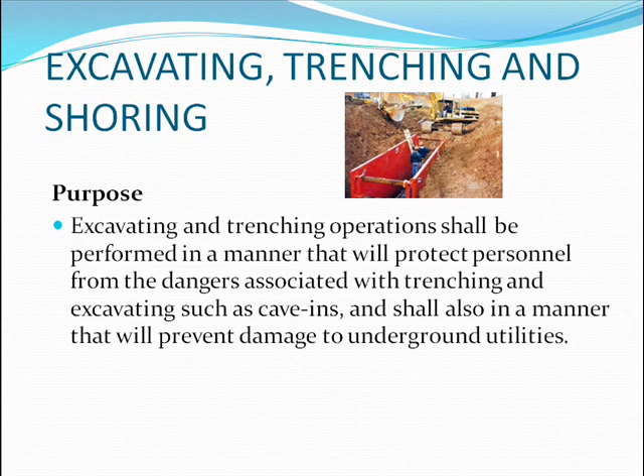Responsibilities. Health, safety, security, and environmental. HSSE has the primary responsibility for assisting departments in implementation of this policy through coordinating training and consultation.

This includes on-site evaluation to monitor use of safe work practices and procedures, assisting with atmospheric testing and equipment selection as needed, providing or identifying appropriate training for competent persons and staff, and reviewing and updating this program at least annually.

Managers and supervisors. Supervisors have the primary responsibility for the implementation of the trenching and excavation safety policy in their work area. The supervisor has ultimate responsibility for the safety of the employees and general public affected by the excavation.

This includes the evaluation of the work to be performed, determination of the means of protection that will be used, and adherence to the provisions of this policy as appropriate.

The supervisor must ensure daily, or more often as required, that site conditions are safe for employees to work in excavations. The supervisor or a member of the work group must be a competent person as defined by OSHA.

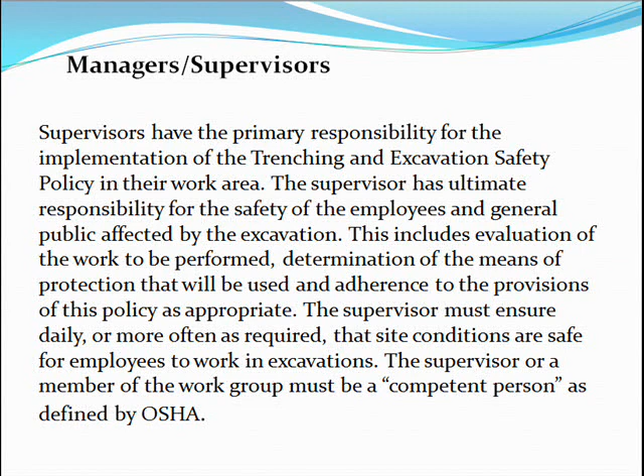Employees and partners. Employees and partners are responsible for the following: asking questions of their supervisors when concerned about an unknown or hazardous situation or substance, reporting all unsafe conditions, practices, or equipment either to their supervisor or to the HSSE Department, keeping informed about conditions that may impact their health and safety, and participating in training programs.

Employees have the primary responsibility for working in accordance with the provisions of this policy. No employees should enter an excavation meeting the scope of this policy until authorized by the competent person.

General requirements. Each time excavation in excess of 5 feet is performed, there must be a competent person on site to evaluate each trench or excavation and determine the necessary precautions to take. The competent person's name and qualifications must be submitted to the safety manager in advance of any excavation being performed.

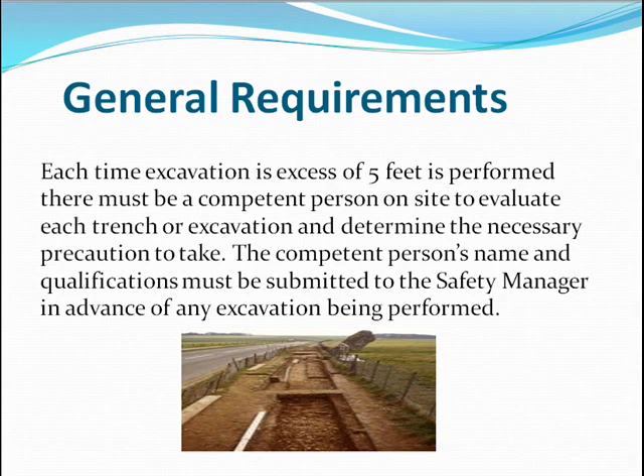Competent person: one who is capable to identify existing and predictable hazards in the surroundings or working conditions that may affect employees and the general public, and has authority to take prompt corrective measures to eliminate them.

The competent person must be trained in and knowledgeable of excavation and trenching standards and other programs that may apply, such as hazard communication, confined space, and respiratory protection.

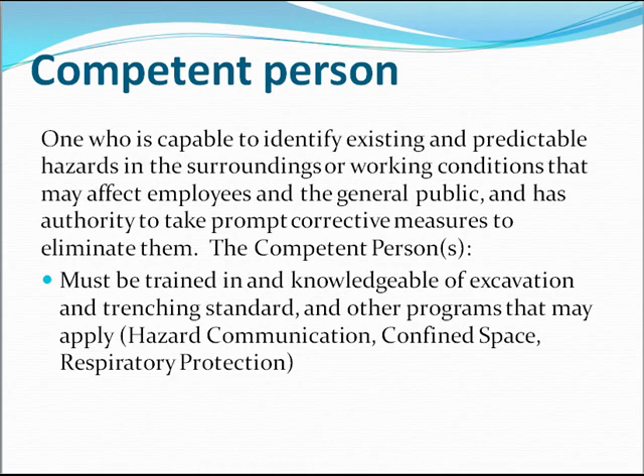The competent person also must be capable of recognizing hazardous conditions and must have authority to stop work and ensure that hazards are corrected. They perform and document the daily excavation inspection and know when inspections should be performed.

They must assure that the location of underground installations or utilities have been properly located, and must identify and ensure the use of adequate protective systems, work methods, and personal protective equipment, or PPE, on excavation sites.

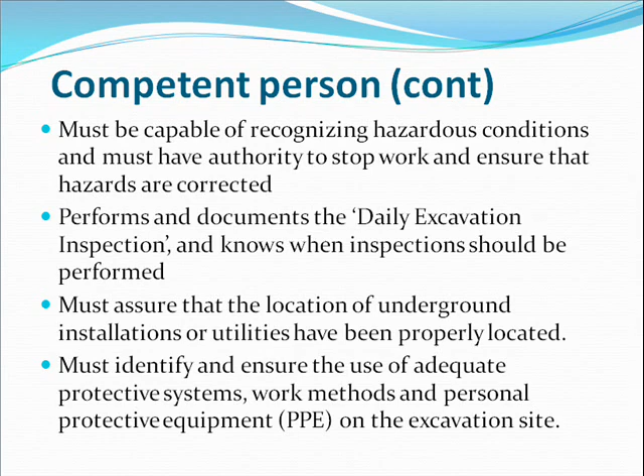Shoring: a structure such as a metal hydraulic, mechanical, or timber shoring system that supports the sides of an excavation and which is designed to prevent cave-ins.

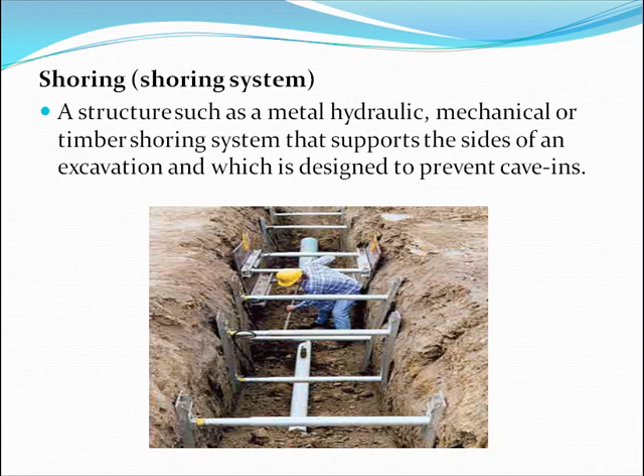Sloping: a method of protecting employees from cave-ins by excavating to form sides of an excavation that is inclined away from the excavation so as to prevent cave-ins. The angle of incline varies with differences in such factors as soil type, environmental exposure conditions, and application of surcharge loads.

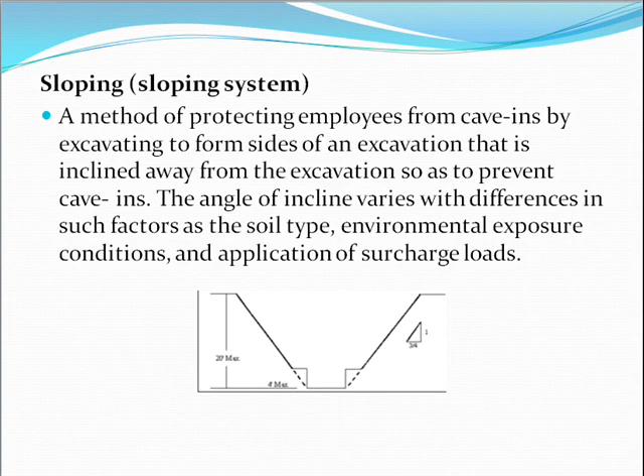Soil type A is the most stable soil. It includes clay, silt, and hardpan, and it resists penetration. No soil is type A if it is fissured, is subject to vibration of any type, has previously been disturbed, or has seeping water.

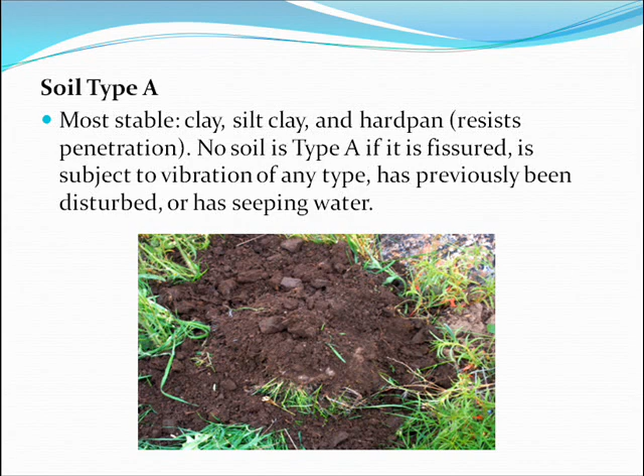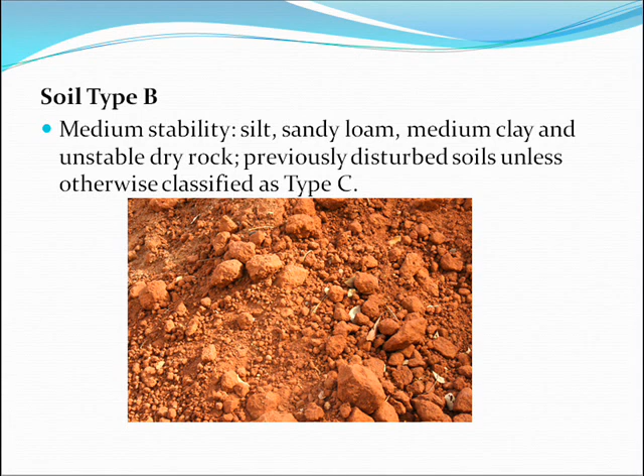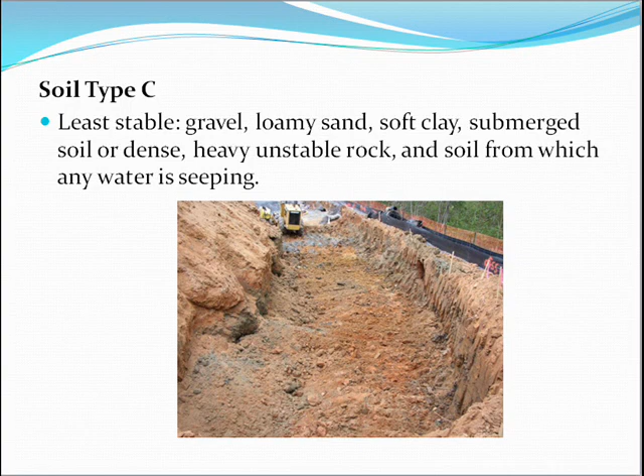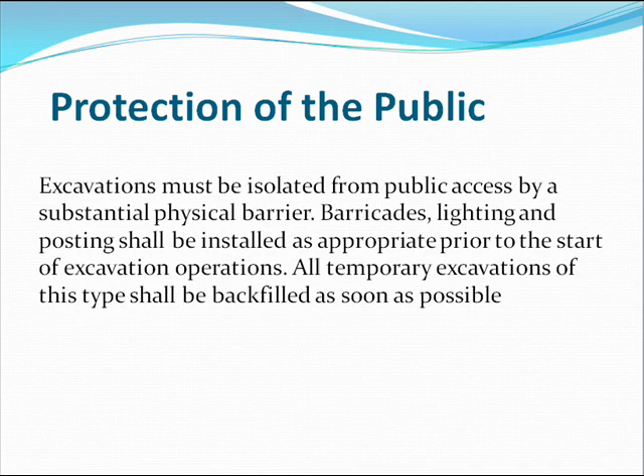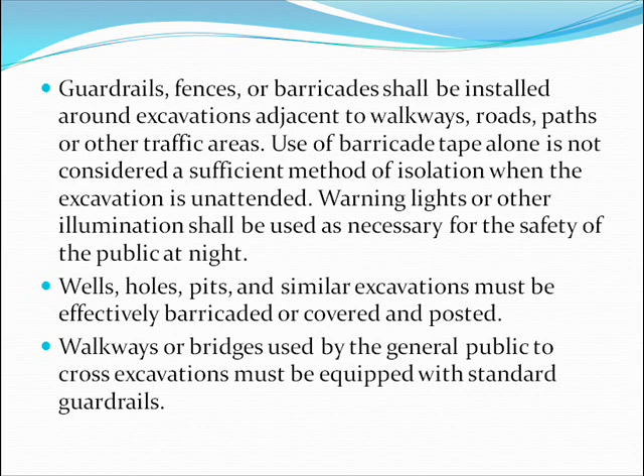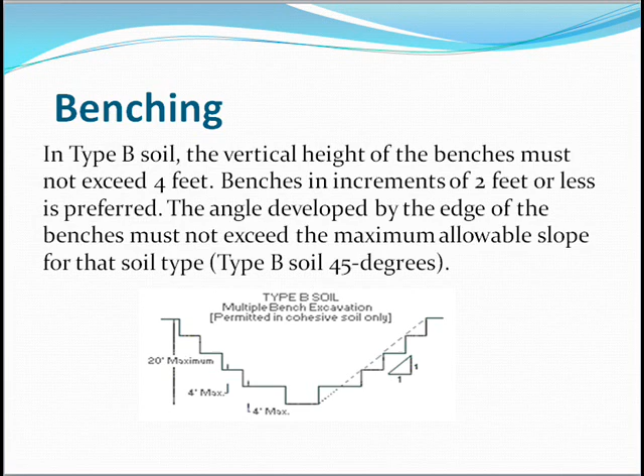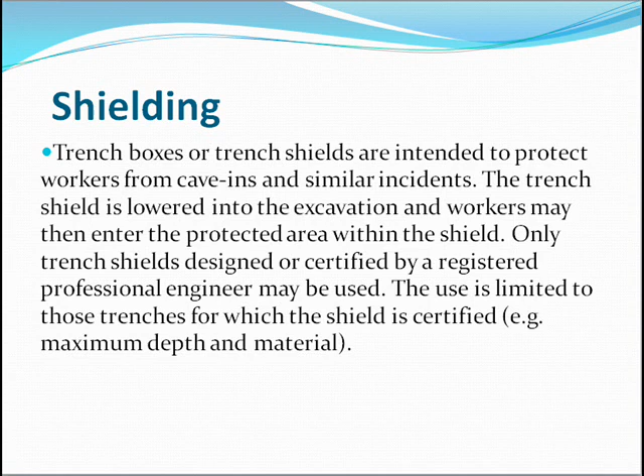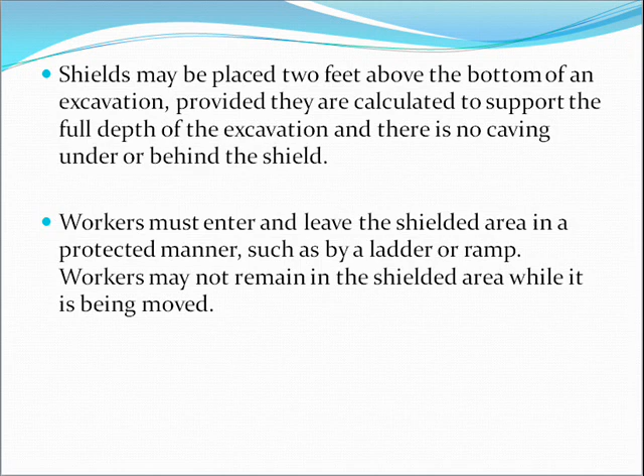Shields may be placed 2 feet above the bottom of an excavation, provided they are calculated to support the full depth of the excavation and there is no caving under or behind the shield. Workers must enter and leave the shielded area in a protected manner, such as by a ladder or ramp. Workers may not remain in the shielded area while it is being moved.

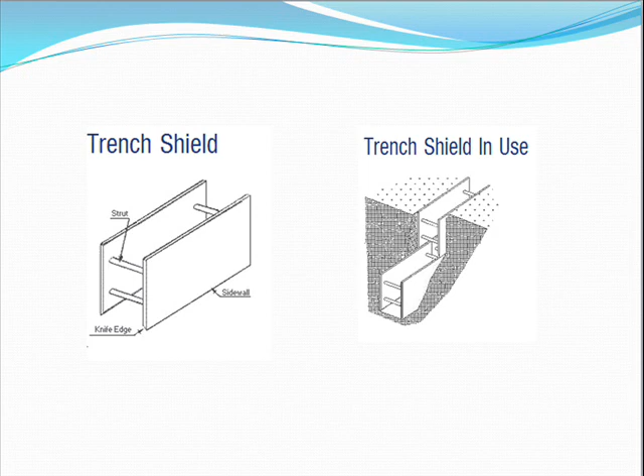Shoring. All shoring shall be installed from the top down and removed from the bottom up. Hydraulic shorings shall be checked at least once per shift for leaking hoses and/or cylinders, broken connections, cracked nipples, bent bases, and any other damaged or defective parts. The top cylinder of hydraulic shoring shall be no more than 18 inches below the top of the excavation.

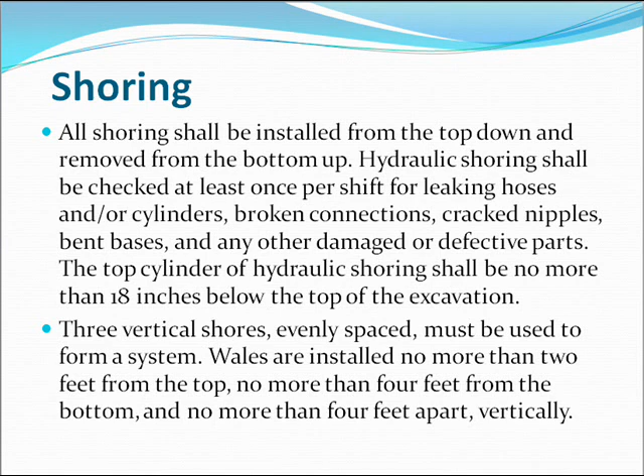Three vertical shores, evenly spaced, must be used to form a system. Wales are installed no more than 2 feet from the top, no more than 4 feet from the bottom, and no more than 4 feet apart vertically.

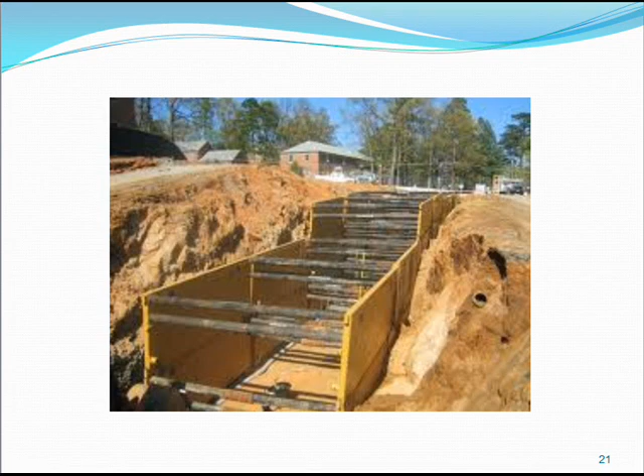Inspections. Frequent inspection of the excavation and surrounding area by the competent person is critical to ensure the safety of the workers involved in work within the trench. The competent person must conduct inspections of the entire excavation site, daily and before the start of each shift, as dictated by the work being done in the trench, after every rainstorm, when fissures, tension cracks, sloughing, undercutting, water seepage, bulging at the bottom, or other similar conditions occur, when there is a change in the size, location, or placement of the spoil pile, and when there is any indication of change or movement in adjacent structures.

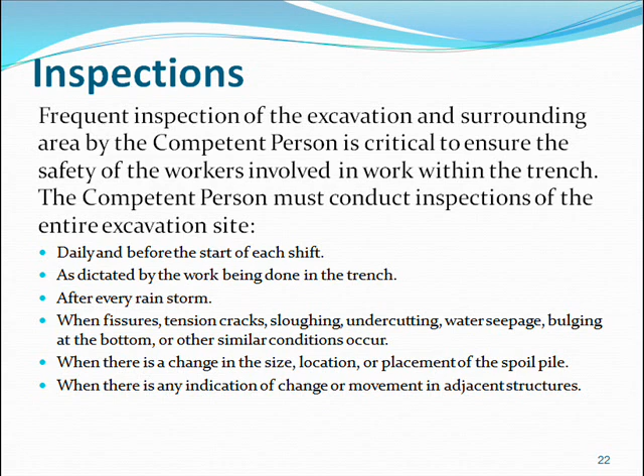Temporary spoil shall be placed no closer than 2 feet from the surface edge of the excavation. The distance is measured from the nearest base of the spoil to the cut. The distance should not be measured from the crown of the spoil deposit. This distance requirement ensures that loose rock or soil from the temporary spoil will not fall on employees in the trench.

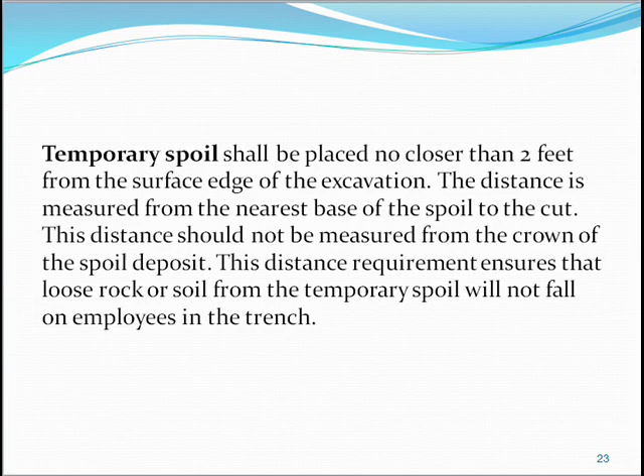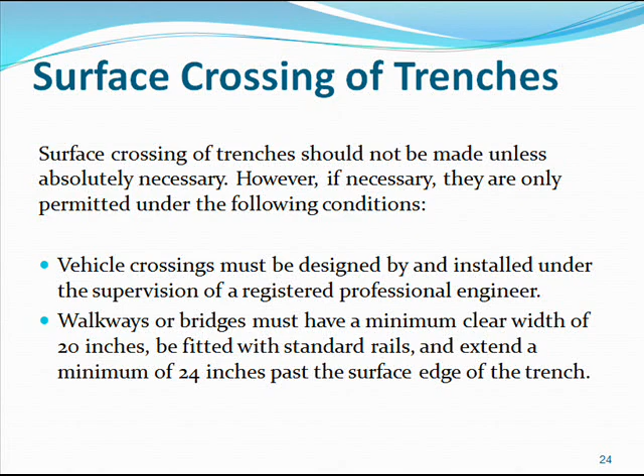Surface crossing of trenches. Surface crossing of trenches should not be made unless absolutely necessary. However, if necessary, they are only permitted under the following conditions: vehicle crossings must be designed by and installed under the supervision of a registered professional engineer. Walkways or bridges must have a minimum clear width of 20 inches, be fitted with standard rails, and extend a minimum of 24 inches past the surface edge of the trench.

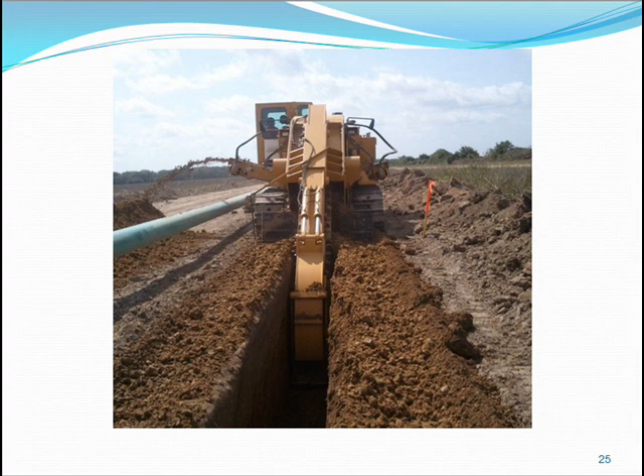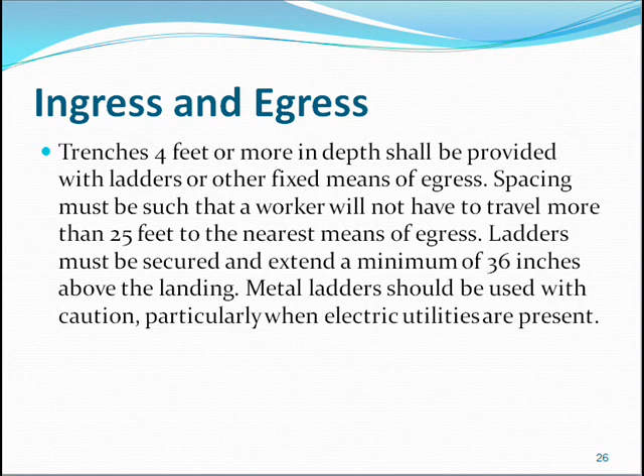Ingress and egress. Trenches 4 feet or more in depth shall be provided with ladders or other fixed means of egress. Spacing must be such that a worker will not have to travel more than 25 feet to the nearest means of egress. Ladders must be secured and extend a minimum of 36 inches above the landing. Metal ladders should be used with caution, particularly when electric utilities are present.

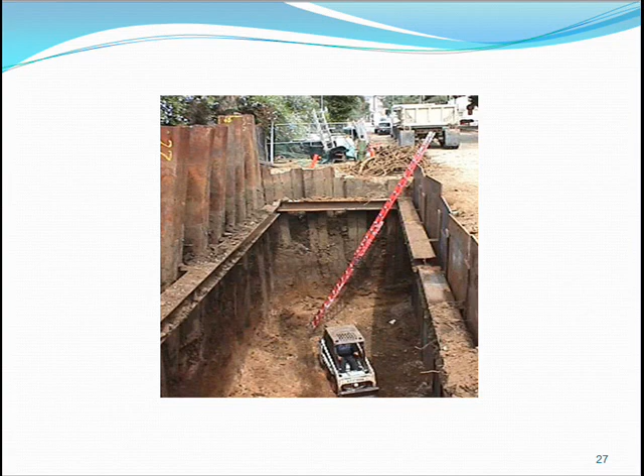Exposure to vehicles. Employees exposed to vehicular traffic shall be provided with and required to wear reflective vests or other suitable garments marked with or made of reflectorized or high visibility materials. Trained flag persons, signs, signals, and barricades shall be used when necessary.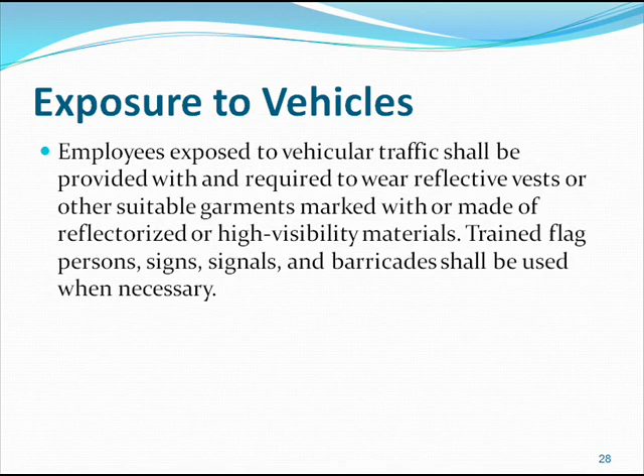Exposure to falling loads. Employees are not allowed in the excavation while heavy equipment is digging. Employees must not work under loads being lifted or moved by heavy equipment used for digging or lifting. Employees are required to stand away from equipment that is being loaded or unloaded to avoid being struck by falling materials or spillage.

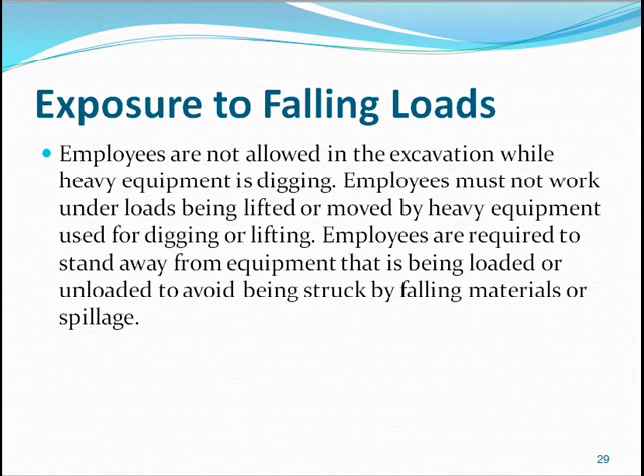Hazardous atmospheres and confined spaces. Testing for atmospheric contaminants. If there is any possibility that the trench or excavation could contain a hazardous atmosphere, atmospheric testing must be conducted prior to entry. Testing should be conducted before employees enter the trench and should be done regularly to ensure that the trench remains safe. Employees required to wear respiratory protection must be trained, fit tested, and enrolled in the respiratory protection program.

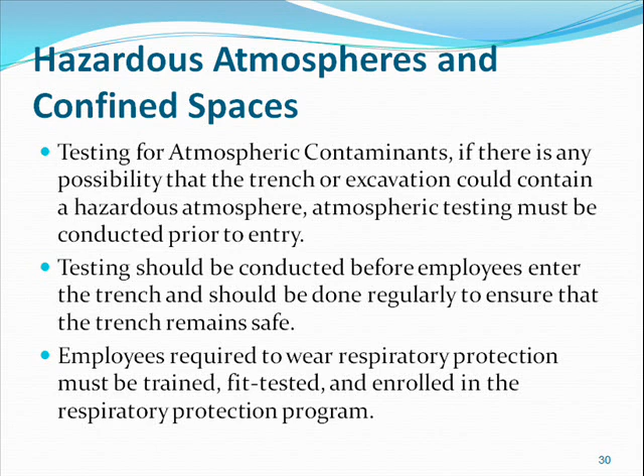Employees shall not be permitted to work in hazardous and/or toxic atmospheres. These include atmospheres with less than 19.5% oxygen, a combustible gas concentration greater than 20% of the lower flammable limit, and concentrations of hazardous substance that exceed those specified in the threshold limit values for airborne contaminants established by the ACGIH.

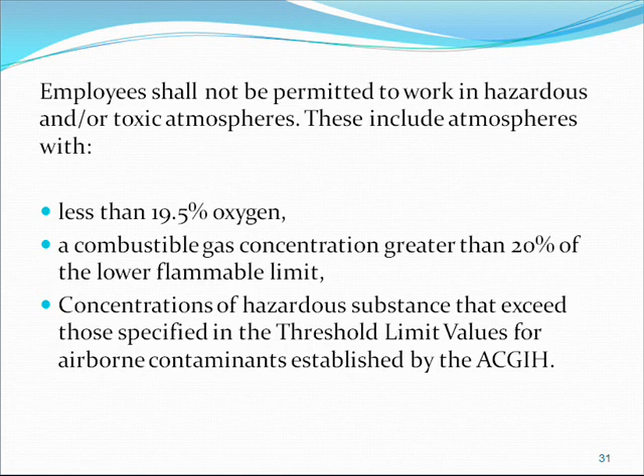Standing water and water accumulation. Workers must not enter or work in excavations with standing water or in which water is accumulating unless adequate protection is provided. Protective methods for these circumstances must include use of special support or shield systems approved by a registered professional engineer, water removal equipment used and monitored by a competent person, and safety harnesses and lifelines used in conformance with 29 CFR 1926.104.

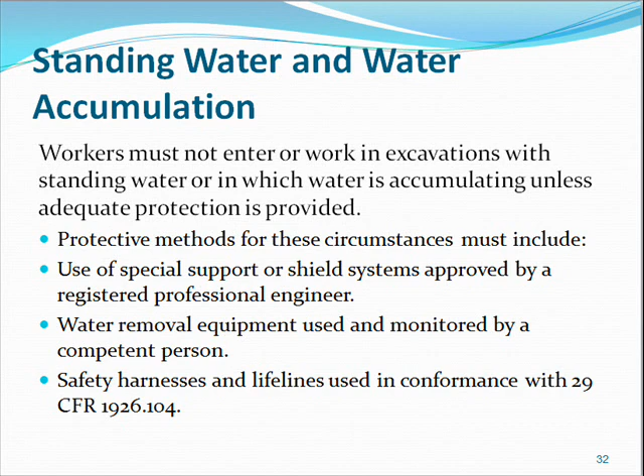Emergencies. OSBT personnel are not trained to perform trench rescues and should not place themselves at risk in order to attempt the rescue of someone trapped due to a cave-in. In the event of a serious injury or trapped worker requiring specialized rescue, 911 must be called immediately. Police department should be notified after you call 911.

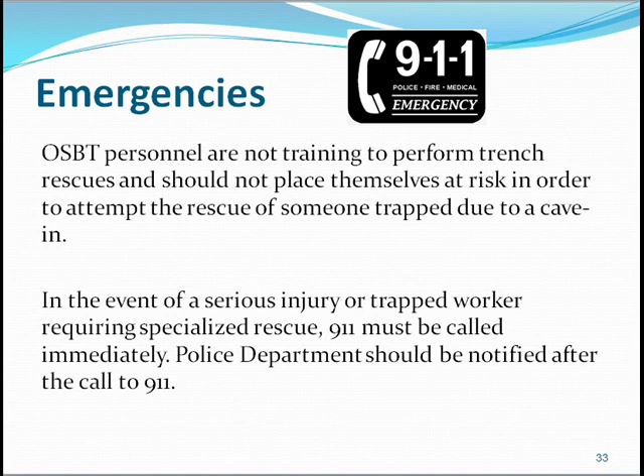Training. Any employee required to dig or enter an excavation shall attend at a minimum trenching and excavation safety awareness training prior to beginning related work. The training is provided by the HSSE Department or site-specific and covers the potential hazards encountered when working in and around excavations and the procedures that need to be followed in order to avoid these hazards.